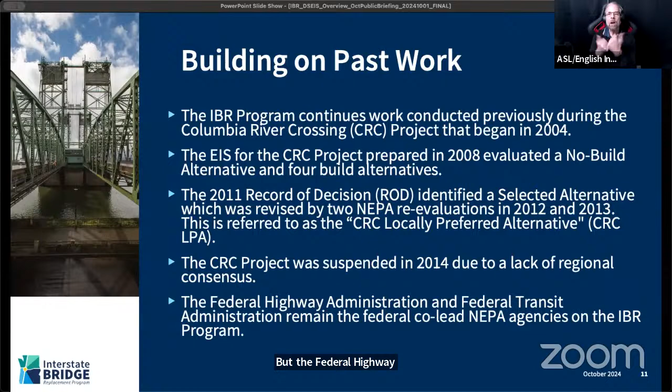So why are we looking at a draft supplemental? Part of the conversation we started having with our federal leads through NEPA was that the transportation challenges identified during CRC—the purpose and need, as Greg said—continue to exist today and remain unresolved. Because the purpose and need did not change, the foundation documents that CRC provided continued to be valid, but we needed to make sure that as we move forward, we accounted for changed conditions, including physical environment, community priorities, and regulation changes. So we needed to update that, and the National Environmental Policy Act affords for that through a supplemental analysis.

So in 2021, the federal lead agencies issued a NEPA reevaluation to assess the extent of those changes. They determined that a supplemental was the right path to identify and disclose the new adverse impacts and any mitigation necessary to address the changed conditions. And so IBR started out drafting the draft supplemental EIS.

As Greg said, every environmental document through NEPA starts with a purpose and a statement of need. IBR continues and pulled forward the Columbia River Crossing's 6 need statements: safety, impaired freight, congestion, earthquake vulnerability, inadequate active transportation paths, and limited public transportation. We continue to address those with the modified locally preferred alternative, and that's what we're really talking about today.

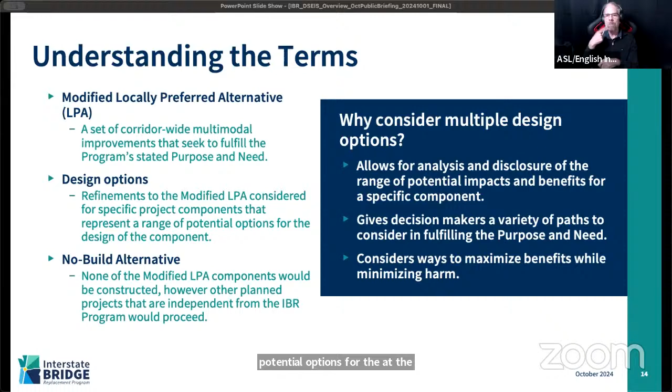Within the environmental impact statement, there are three general technical areas being evaluated: transportation, community, and environmental technical areas.

For transportation, we're looking at transportation networks, including transit, how the highway connects to existing streets, air quality impacts, impacts to aviation, navigation, the effect on energy and greenhouse gas emissions, and noise and vibration.

Within community, that includes cultural resources and economics, environmental justice, impacts to land use and neighborhoods, property acquisitions, and public services. And for the environment, that includes looking at climate change, impacts to ecosystems and groundwater, the impacts of the program on visual quality, water quality, as well as wetlands and waters of the state.

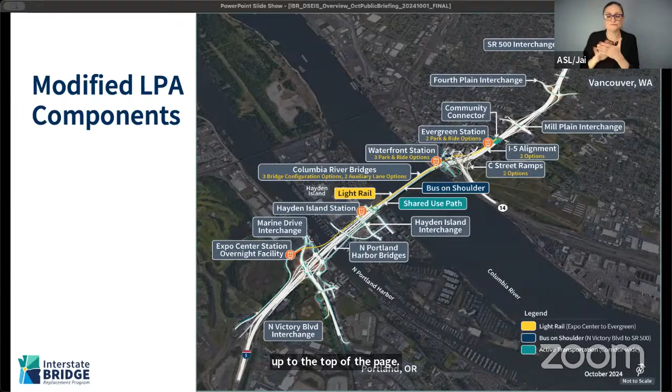Tolling, as I mentioned, will help pay for the construction of the program area investments, as well as manage congestion. All tolling will be electronically collected, as there will not be a need for vehicles to stop. The timeline is that the start of tolling would be as early as 2026, after construction in the corridor begins.

There is currently work being done by the transportation commissions for rate setting. Once the new bridge is in place, the pre-completion tolling would be shifted onto the new bridge to continue. Tolling is expected to be variable rate tolling, so you know the prices before you go. This supplemental EIS is studying variable rates that range from $1.50 to $3.15 per trip.

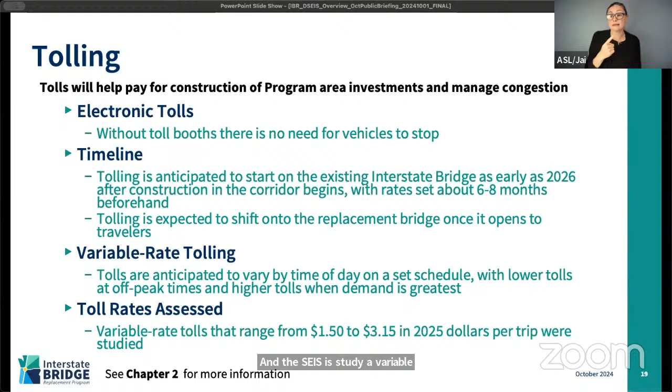As I mentioned, the Oregon and Washington Transportation Commissions have been meeting and will be rate setting, as well as studying the exemptions or discounts involved in tolling. They will be setting those rates in the last 6 to 8 months before tolling begins, and again, that could be as early as 2026.

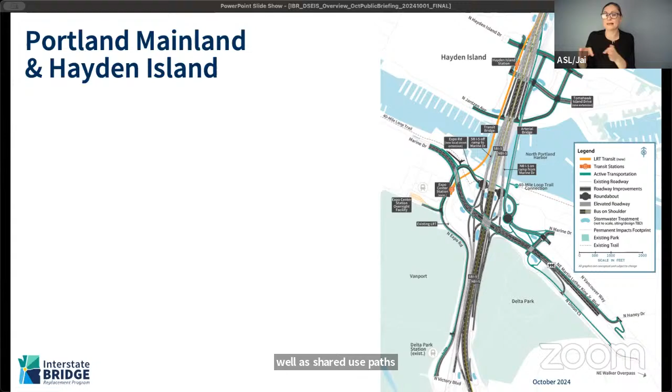As you can see on the left side of the picture, the yellow or orange colored graphic reflects the extension of light rail from the current Expo station across North Portland Harbor, elevated across Hayden Island with a new station on Hayden Island, and then extending northward onto the river bridge. Also in the program area, you'll see the various greenish colors reflecting active transportation improvements, both with local street connections as well as shared use path connections to existing or planned facilities within the local agency jurisdiction.

And I will move north to the river. Next slide, please. Across the river, now we're seeing Hayden on the south side of our screen, on the lower portion of the screen, and Vancouver in the upper portion of the screen. You see the replacement of the I-5 bridges to the west, just immediately downstream of the existing bridges. On the north side of the screen, we'll see the SR14 interchange and moving northward into Vancouver.

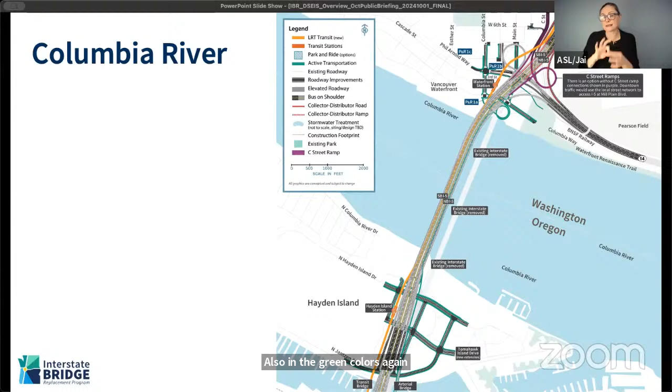Across the river bridge, we have both active transportation, light rail, and vehicular traffic for those replacement bridges. I have a little bit more detail coming up. In Vancouver, you see the transit exiting the bridge on the orange color again, with a waterfront station right near the bridgehead, and then moving northward towards Evergreen. Also, you can see in the green colors again, active transportation connecting down off of the bridge, connecting to the local network east-west and north-south within the program area.

Next slide, please. This is giving you some additional information about the existing interstate bridge, the cross section of the current bridge as it sits today. You can see there are 3 through lanes of traffic in each direction, both northbound and southbound. Some of the things to point out: they are very narrow lanes, there are no shoulders on the bridge in either direction, and in addition, you have these sidewalks on the outside of the bridge that are very narrow. Additionally, with the bridge as it currently sits, in the bridge lift we experience on average about 257 stoppages in a year, whether the bridge is lifting or for maintenance of the bridge itself.

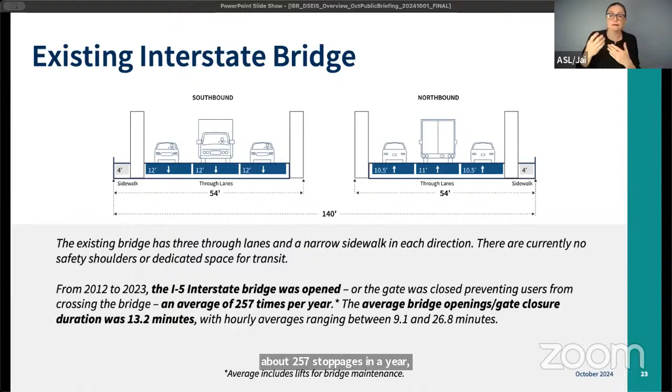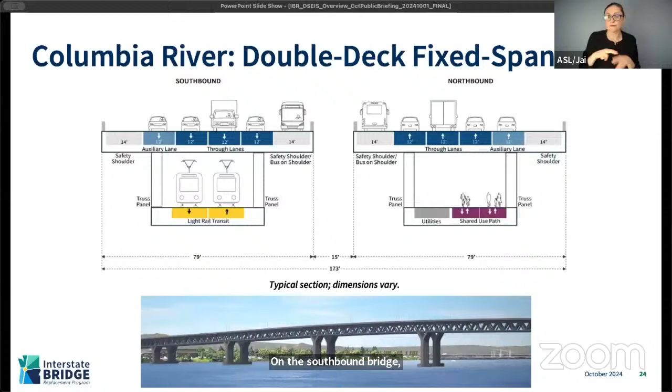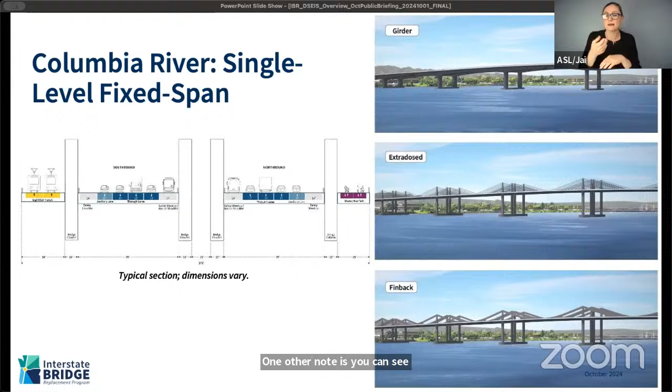Next slide, please. This is the single level fixed span cross section. This means all modes are at the same level across the bridge cross section, so you see the vehicular traffic and the active transportation on that northbound bridge. Same thing for the southbound bridge: you see the vehicular traffic and then the light rail transit on that southbound bridge. One other note is on the inside shoulder, you can see representation of a bus on shoulder in each direction. The graphical depictions on the right reflect a couple of different bridge types under a single level type bridge.

Next slide. And this last bridge configuration is for single level movable span. Again, for single level, all of the modes are at the same level going across the river. The pictures on the right reflect the bridge in the open position or lifted position so that river traffic can navigate through the lift span, and then the closed position in the lower graphic. Next slide, please.

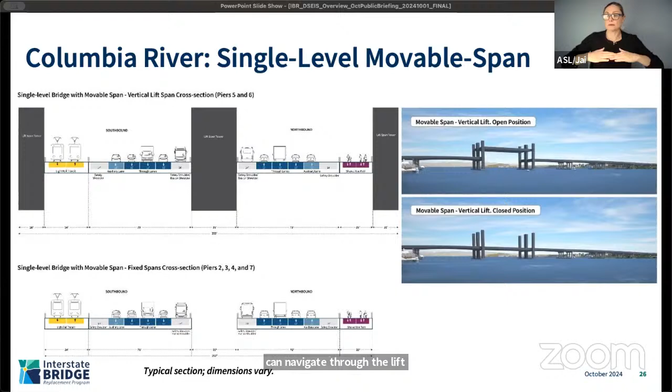Moving more northward into Vancouver, as I mentioned, the light rail crossing the river with the waterfront station, an elevated station, and then also the Evergreen station, which would be the terminus of light rail just out there of Evergreen Boulevard. Also reflecting an active transportation community connector in that vicinity, just immediately south of Evergreen Boulevard.

This also reflects options for the C Street ramps, as well as the westward shift of I-5, and I'll talk a little bit more about that. Next slide, please.

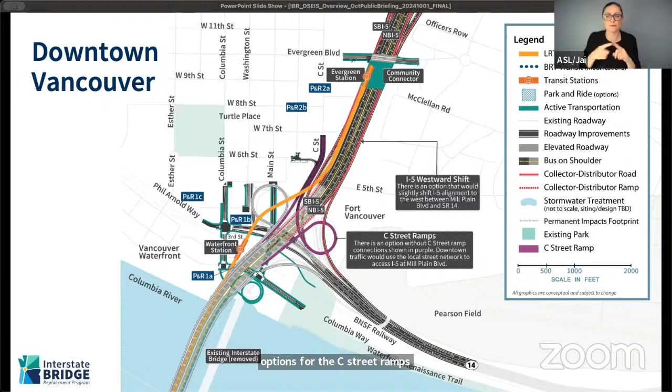So the C Street ramps, our analysis would include the option of the C Street ramps in order to better reflect a range of impacts, whether the ramps are actually replaced or that they're not replaced in the proposed improvements. It gives an idea between the different level of impacts being studied to resources in the program area. You can see those reflected in the purple here on the screen.

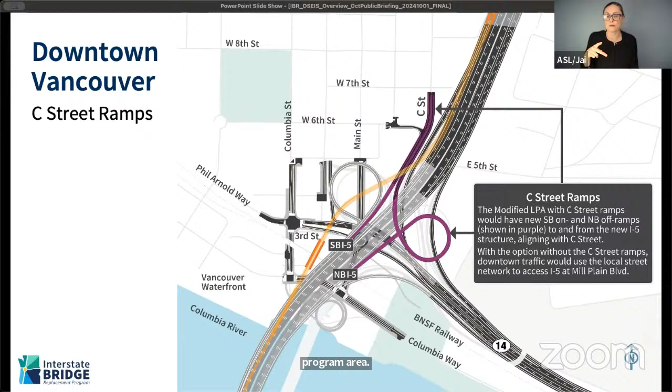Next slide, please. Next, we're talking about the I-5 westward shift. Again, this is studying a range of impacts if I-5 is replaced more centered on the alignment that it currently sits in, or with a more westward shift, moving more of the impacts slightly to the west with the improvements. Next slide, please.

And the last option that's in this area for what's being studied is our locations of park and rides. There are currently identified 5 different potential locations: 3 locations for a potential park and ride at the waterfront, listed as P&R 1A, 1B, and 1C. And then in the upper portion of the picture, you see 2 other possible locations for a park and ride that would serve the Evergreen Station, listed as P&R 2B or 2A. So those are the park and ride location options.

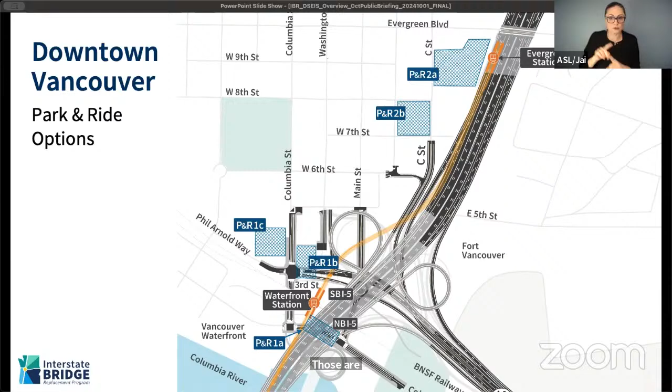Next slide, please, as we move northward. Mill Plain interchange is at the bottom of the screen, and then Fourth Plain at the top of the screen. The improvements being proposed in the area include active transportation, as well as some connection improvements for both the interchanges, such as the northbound off-ramp that goes to Fourth Plain Boulevard would be just south of Mill Plain into a collector distributor. And again, working with the local community on what those investments would be for active transportation through the corridor.

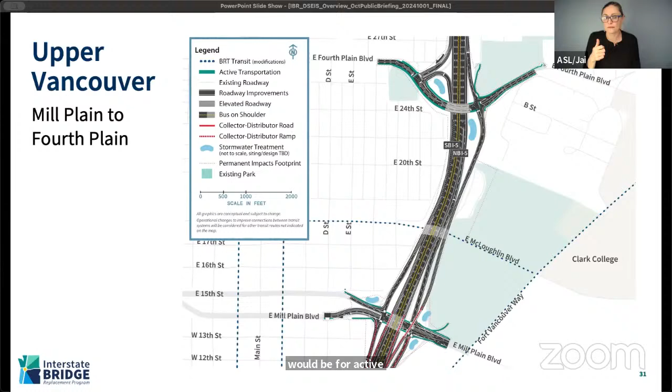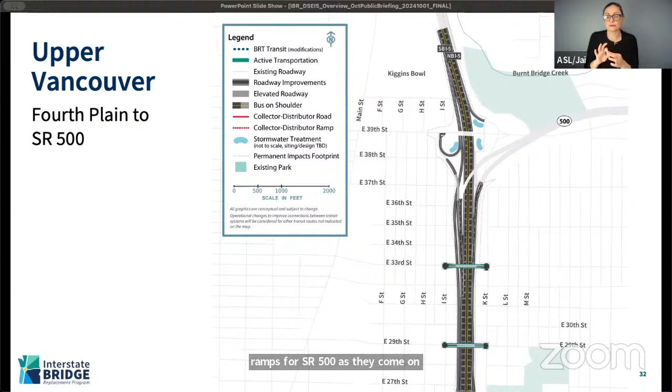Next slide, please. The last remaining option that I wanted to cover was the number of auxiliary lanes. This graphic represents these auxiliary lanes, which are the ramp-to-ramp connections, reflecting whether there's one auxiliary lane across the river or two. So you can see in the graphics the difference between where those connections are made, again to help the operations and safety through the program area.

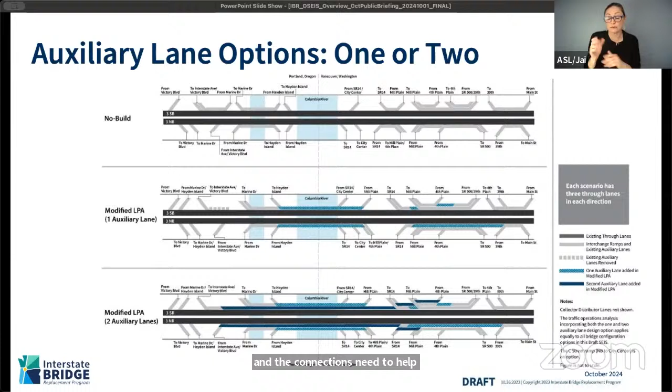And with that, I believe I'm handing it over to Ryan LeProwse, our transportation lead.

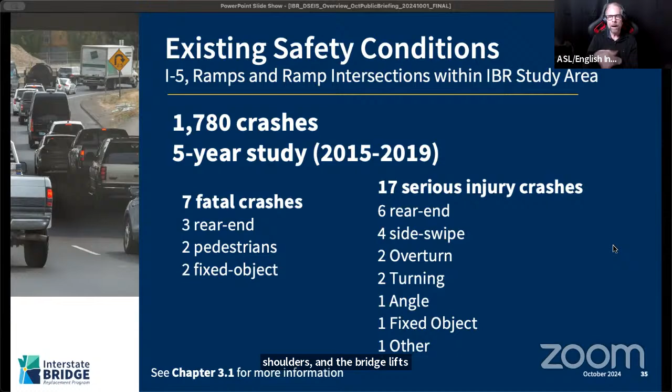In 2045, the no-build alternative is forecast to increase crashes by about 28% over current conditions. The modified LPA with one auxiliary lane or the modified LPA with two auxiliary lanes are both expected to reduce crashes between 13 and 17% compared to the no-build, due to the geometric changes that Casey went over, as well as the auxiliary lanes, CD roadways, lane widths, and full shoulders. Next slide.

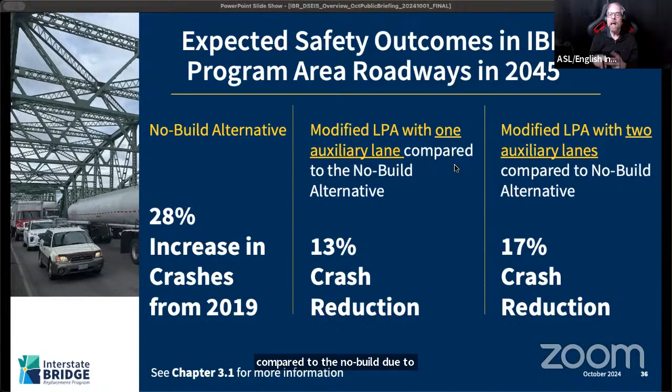Daily person throughput across the I-5 Interstate Bridge is forecast to increase by about 30% with the 2045 no build compared to existing conditions. The modified LPA with one auxiliary lane or two auxiliary lanes are both supposed to increase by about 4% compared to the no build condition.

The increase in daily person throughput with the modified LPA and design options compared to the no build is due to the increase in transit and active transportation facilities, as well as the variable rate tolling that Casey mentioned earlier.

Next, I'm going to go into the average weekday vehicle trips on the I-5 Columbia River bridges. In 2019, under existing conditions, there's about 143,000 average weekday vehicle trips across the bridge. In 2045, that is going to increase by about 26% to around 180,000 average weekday.

The modified LPA with one aux and two aux will reduce that by about 3%, due to the investment in high capacity transit, including LRT extended across the river from Expo to the Evergreen area, express bus on shoulder improvements, new park and ride lots throughout the program area, variable rate tolls, and improvements to the bridges and active transportation facilities.

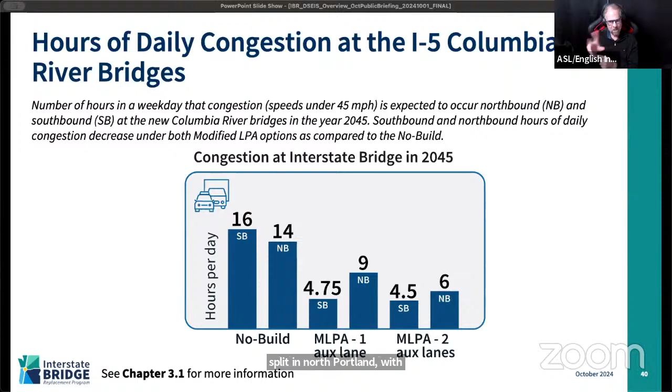Next, I'm going to get into transit travel times. We studied travel times for each mode of transit, including the light rail extension from the Expo Center to Evergreen Boulevard, and express bus enhancements using bus-on-shoulder operations. These travel times are for the origin-destination pair from downtown Vancouver near Evergreen Boulevard to Pioneer Courthouse Square in downtown Portland. Total transit travel time includes waiting time and about 10 minutes combined walk time on either end of the trip.

Under the modified LPA and design options, light rail transit travel time is about 47 minutes. For the express bus, the southbound AM express bus under the modified LPA and design options will be 59 minutes, compared to 48 minutes with the no-build.

While the southbound bottleneck at the Columbia River Bridge will be reduced under the modified LPA and options compared to no-build, the improved southbound flows would increase the extent and duration of downstream bottlenecks approaching the I-5/I-405 split, with congestion spilling back into the program area. For southbound AM peak movements between Vancouver and the Rose Quarter or downtown Portland, LRT times are not impacted by that congestion on I-5.

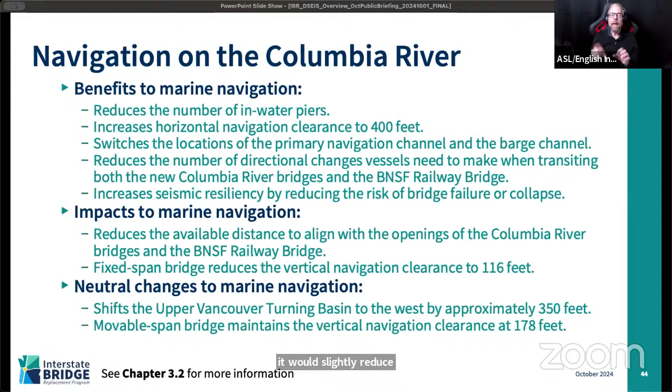Next slide. This graphic shows all of the bridge configurations superimposed onto one graphic, looking west towards the bridge. On your left is Hayden Island, and on your right is Vancouver, Washington. The black dashed line shows the profile of the existing interstate bridge. The double-deck fixed-span bridge is shown by the solid dark blue line. Its upper deck is probably the clearest to see on this graphic, but its lower deck, where transit and the shared use path would be located, would be the same height as the single-level fixed-span bridge, which is represented by the dashed teal line.

Both the double-deck and single-level fixed-span bridges would provide 116 feet of vertical navigation clearance over the primary navigation channel for marine vessels to pass under the bridge. The single-level movable span bridge, shown in the maroon color, would provide 178 feet of vertical navigation clearance in the open position over the primary navigation channel, which is the same clearance that the existing bridge provides today. All these bridge configuration options would provide a higher vertical navigation clearance than the existing bridge in the closed position.

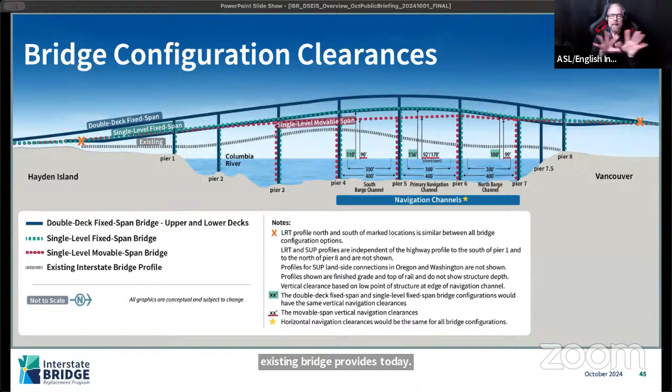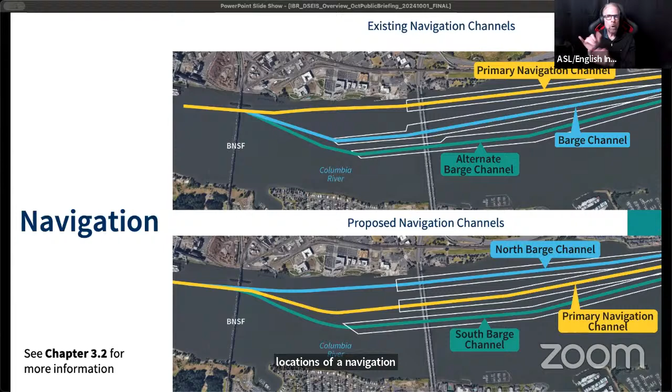This graphic shows how the navigation channels would be relocated. The top image shows the existing locations of the navigation channels, and the lower image shows how the location of the primary navigation channel, which is shown in yellow, would be shifted to the middle, and the barge channels would be located to its north and south.

This project, like many projects, requires acquisition of additional land. We are looking at acquiring approximately 47 acres throughout the 5-mile corridor to construct the modified LPA. Depending on design option, there are additional acquisitions. Sometimes it's a small addition like 0.1 or 0.2 acres, but some of the park and ride location options could require up to 3 acres.

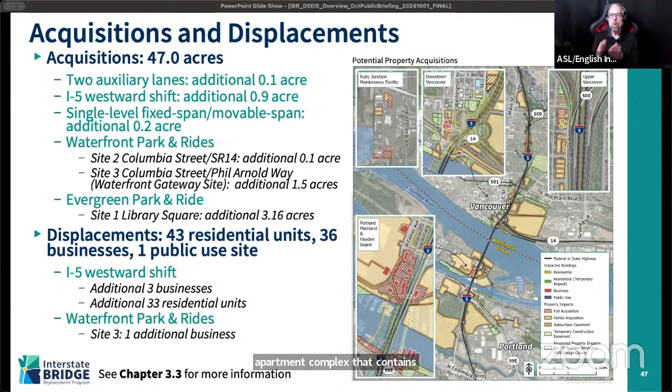As a result of these acquisitions, the project would displace approximately 43 residential units, 36 businesses, and 1 public use site. The I-5 westward shift in downtown Vancouver would require displacing 3 additional businesses and 1 additional apartment complex that contains 33 residential units. The IBR program understands the impact that acquisitions and displacements have on the residents of these homes and units, as well as the business owners. On the next slide, I will describe where we are in the right-of-way process.

Next slide. Right now, we are at a conceptual level of design. The IBR program will do everything feasible to avoid and minimize potential impacts to property. No final decisions have been made about what will be built, and there are still several steps remaining before discussions about specific property impacts take place. Discussions with individually impacted property owners will begin after we complete the environmental process. Next slide. The modified LPA is expected to impact and benefit the economy in several ways.

Benefits include improved freight mobility and faster travel times, which improves economic opportunities for everyone. Impacts include a reduction in property tax revenue due to the displacement of residential units and businesses. Additionally, the displacement of 36 businesses would impact approximately 616 jobs. Depending on design options, there could be an increase in the number of businesses displaced and the number of associated jobs that are impacted.

However, it is anticipated that project construction would result in additional economic benefits, such as an increase of employment and spending within the area. For every $1 billion in construction spent, we're expected to see approximately 5,500 direct jobs, such as construction jobs, and almost 11,000 indirect jobs, such as service providers and restaurant jobs. Next slide.

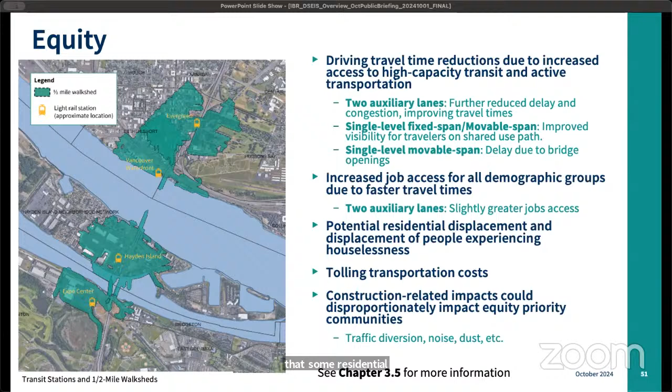Transit noise impacts are mostly related to the proposed light rail system. Due to the light rail extension, there would be about 12 new receptors that would be affected at a moderate level for transit noise. And there would be 12 new residences and 1 theater that would experience transit vibration impacts associated with the light rail system.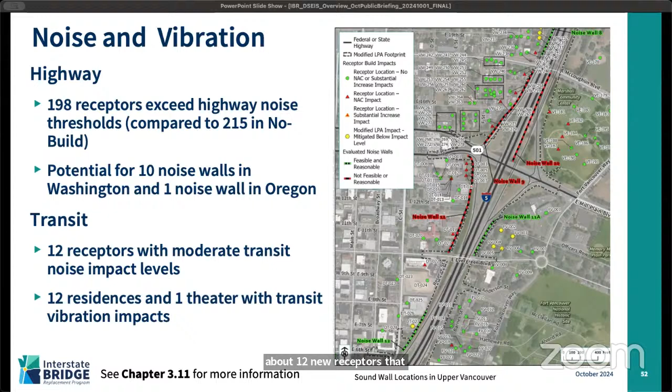To evaluate visual impacts, the program has created several simulations and renderings. The Draft SEIS contains many more simulations, which I encourage you to look at. On this slide, the left set of images are from Hayden Island looking west. The existing bridge is shown in the top left image, the double-deck fixed span in the middle image, and the single-level movable span on the bottom image. The single-level fixed span could look similar as the single-level movable span, but without the lift towers.

The right set of images shows what a vehicle might see while driving north on the bridge towards Vancouver. The top image shows the existing bridge, the middle image shows the top level of the double-deck fixed span bridge, and the bottom image shows the single-level movable span where the lift towers would be located.

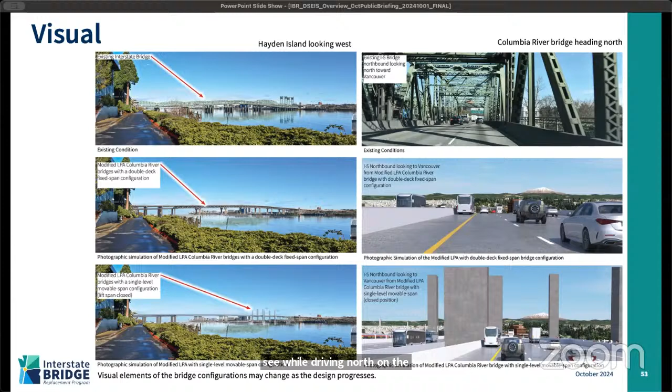These renderings show the Fort Vancouver National Historic Site. The top left image shows the existing bridge in the distance, and you can see the existing lift towers are visible behind the tree line. The bottom left image shows the double-deck fixed span configuration, and the images on the right show the single-level movable span configuration. The top image shows the lift span in the closed position, and the bottom image shows the lift span in the open position.

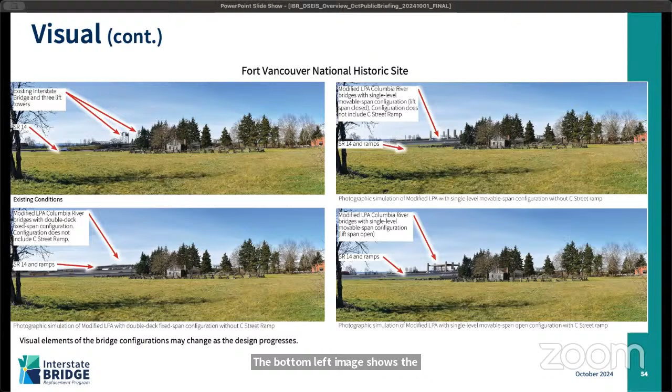For parks and recreation, the map on the right shows all of the existing parks and recreation facilities in the program area. The IBR program would acquire approximately 1.3 acres of park and recreation facilities and would reconstruct or permanently realign approximately 5,800 linear feet of trails. The program would also improve transit access to park and recreation resources within the program area.

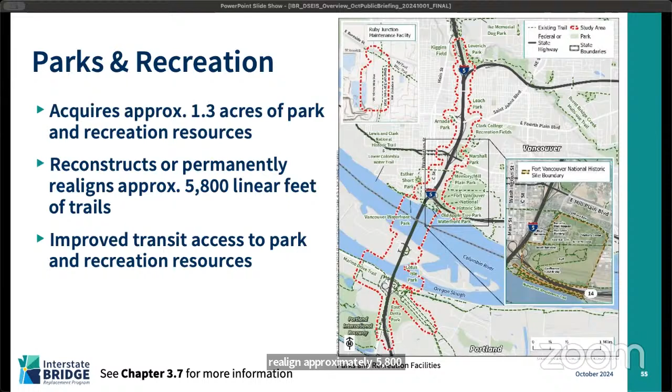The term cultural resources refers to sites, buildings, structures, objects, and districts, which also include traditional cultural properties, historic properties of religious and cultural significance to Native tribes, and cultural landscapes.

The area of potential effect, or APE, is the geographic area the IBR program used to identify cultural resources. It was defined by creating a 100-foot buffer from the project footprint to account for potential effects to identified historic properties. Based on the analysis, 12 of the 15 previously recorded archaeological sites in the APE have the potential to be impacted by construction-related physical ground disturbance.

For above-ground cultural resources, the modified LPA would result in adverse effects to 12 historic built environment resources. These resources could include historic buildings, bridges, and other types of architectural structures.

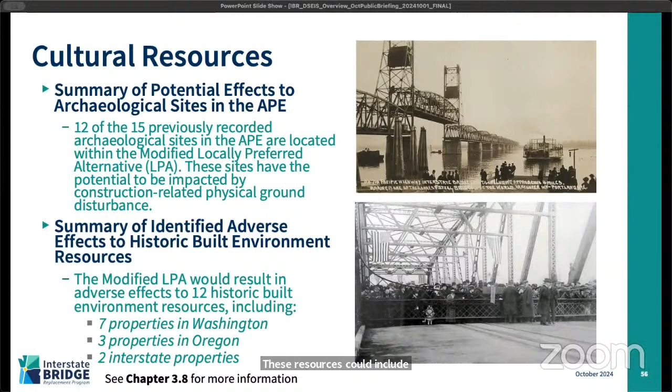Next, I'll talk about the environmental findings of the draft SEIS.

The climate change section of the draft SEIS identifies the climate conditions in the region, highlights federal and state policy and regulations on climate, identifies the potential long-term climate impacts from the modified LPA, and provides potential mitigation measures for unavoidable effects. Based on the analysis, the modified LPA would have the following benefits and impacts to climate change compared to the no-build alternative: increased mode share of low and zero emission modes like transit and active transportation, lower energy consumption and greenhouse gas emissions in 2045 due in part to the mode shift, but also consistent with national trends and regulations, and improvement in climate resilience with materials and design.

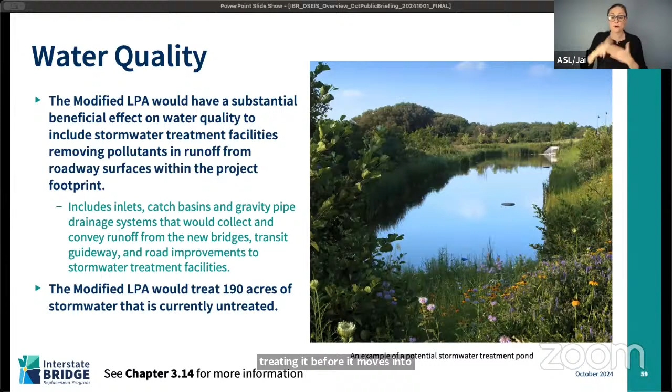Right now, most of the roadways, including the mainline I-5, are not treated for stormwater runoff. One of the major improvements of the IBR program would be collecting stormwater, capturing it, detaining it, and treating it before it moves into our groundwater or surface waters like the Columbia River. The IBR program would be looking at treating nearly 200 acres of impervious surface.

Ecosystems are communities of organisms and the habitat that supports those communities. There are several aquatic species and terrestrial resources in the program area, and several regulatory conditions with which the program needs to comply, especially when constructing a bridge in the Columbia River. The IBR program will be looking at minimizing impacts. There will be mitigation and habitat restoration as part of that effort to minimize the overall net impact of the program on the environment.

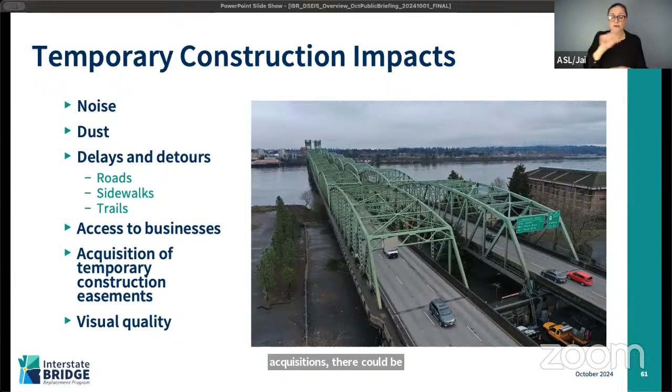Temporary construction impacts are short-term effects that would occur during construction. For the IBR program, temporary construction impacts would include noise, dust in the air, delays on the roadways, and detours, which could impact access to businesses in the area. In addition to permanent acquisitions, there could be some temporary acquisitions, also known as temporary construction easements. And lastly, visual quality could be impacted during construction due to heavy machinery and signage.

As we continue to move forward, the IBR program is always looking to avoid impacts wherever possible. When impacts cannot be avoided, the IBR program will try to minimize those impacts as much as possible. Regulatory compliance efforts are currently underway.

And I think that wraps up the summary of community and environmental findings in the draft SEIS. I'll pass it over to Hannah Williams to continue the presentation.

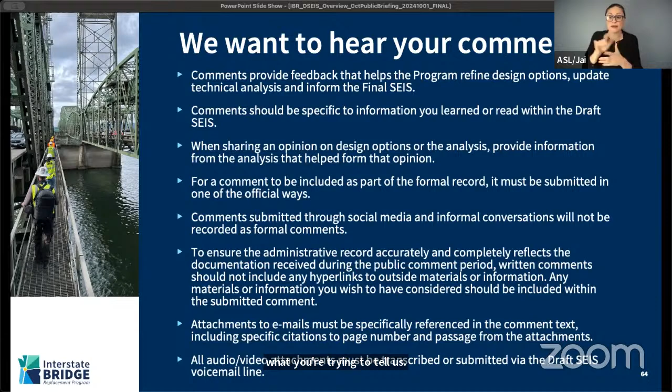Wonderful. So let's get to the next slide to go over the different ways that you can comment.

So ways that you can comment: you can use our comment form on the website, you can send an email to the Draft SEIS website, you can call our voicemail line, you can submit a comment at our public hearing in person, and we will also have virtual public hearings.

Wonderful. So those are the official comment channels. And I also want to go back one slide, my apologies. We have this information available a few different ways.

So you can go on the website. You can look at the Draft SEIS document, the technical reports. We have an executive summary. There's also videos on our website. We also have printed copies of the Draft SEIS.

So the hard copies, they're in a couple locations in Washington and in Oregon. We have them at the IBR offices, Vancouver City Hall, Vancouver Community Library, the Charles Jordan Community Center, the Portland Building, downtown on Fifth Avenue. Another resource to not only get information, but to also ask your questions, to speak with an expert